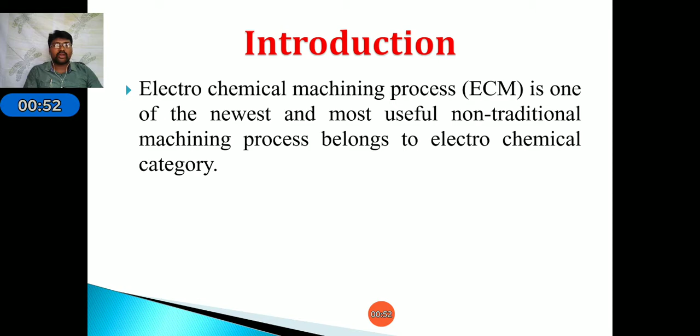The electrochemical machining process is known as ECM, one of the newest and most useful non-traditional machining processes, belonging to the electrochemical category. It is useful to machine metals as well as alloys which are difficult or impossible to machine using conventional machines.

Because if you machine hard materials and alloys, you require special type of machine tools, and the tool must be harder than the given material. By using these conventional machineries, tool wear increases and material removal rate decreases, taking more time. At the time of applying forces, more stresses will be applied on the material. These are the different limitations of the conventional machining process.

In electrochemical machining process, the tool will not touch the workpiece. Based on this, there is no tool wear in this type of machining process.

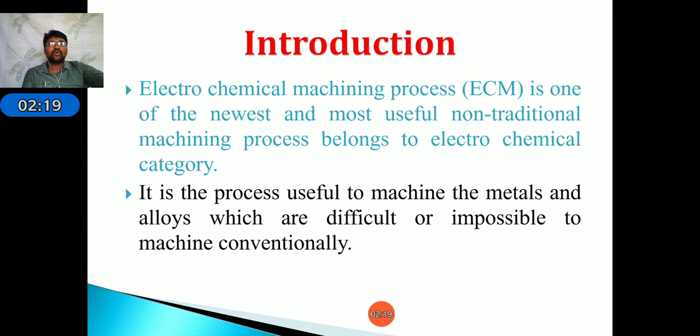Coming to working principle: in ECM, the metal removal takes place by electrochemical dissolution of an anodically polarized workpiece. The metal is removed from the workpiece by passing electricity to it, and the workpiece and tool are immersed in the electrolyte solution, which passes in between the tool and workpiece.

After supplying the electric power source, the negative terminal is given to the tool and the positive terminal is given to the workpiece. In between the tool and workpiece, we maintain some gap, and in that gap we pass the electrolyte solution, which acts as a conducting material. Whenever electricity is passed through the electrolyte, the circuit is closed.

Here, whatever the shape of the tool, the same shape will be machined on the workpiece.

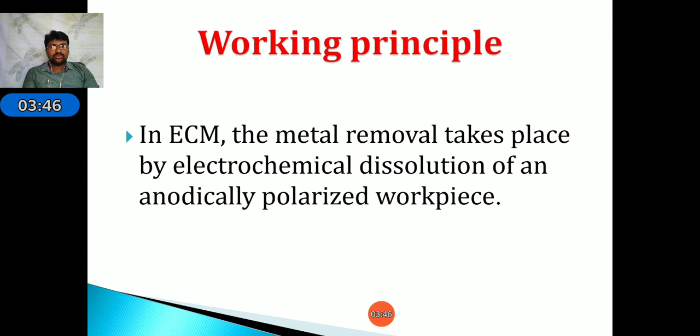We'll go to the working. Here I am showing two diagrams. In the first one, the initial stage of ECM, that is before machining. In the second diagram, the steady state of ECM. The left one indicates the workpiece, and the right is the tool. Both are immersed in the electrolyte solution, and there is a battery.

Whenever we supply the battery, that is supply the power source, the cathode is given to the tool and anode is given to the work. Due to the dissolution, a curve shape is prepared in the tool, and the same shape will form in the workpiece. Whatever the shape of the tool, the same will be mirrored on the workpiece due to the passing of electrolyte solution in between the work and tool.

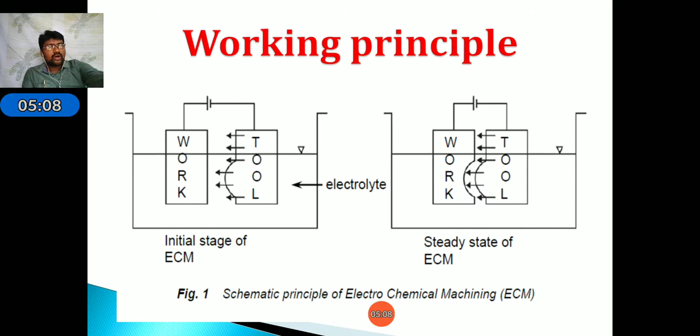In between the tool and workpiece, the electricity will pass due to this dissolution principle. If the material is to be removed, how will it be removed? We'll see in the next diagram.

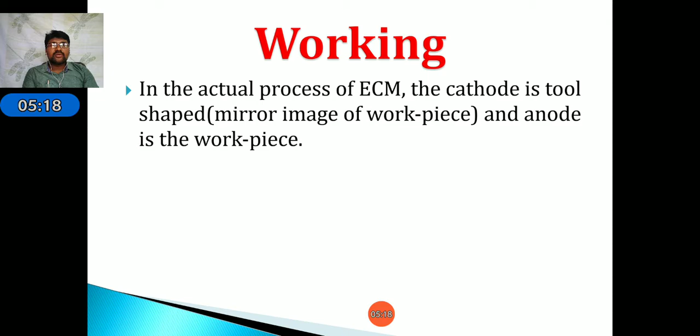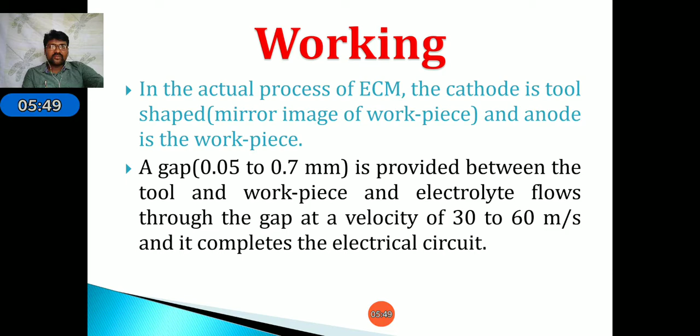In the actual process of ECM, the cathode is tool shaped, that is mirror image of the workpiece, and the anode is the workpiece. The gap between the workpiece and tool is in the range of 0.05 to 0.7 mm based on the type of material, and the electrolyte flows through the gap at a velocity of 30 to 60 meters per second, completing the electrical circuit, so electricity can pass through.

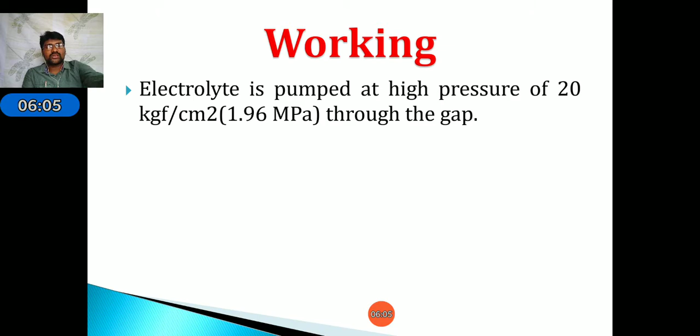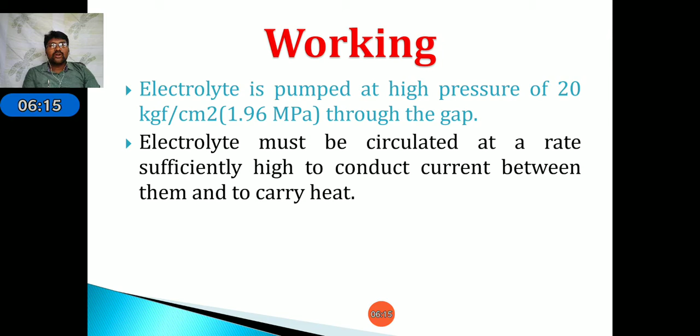The electrolyte is pumped at high pressure of 20 kg per centimeter square, that is 1.96 megapascal, through the gap. The electrolyte must circulate at a rate sufficiently high to conduct current between them and carry heat. The metal is removed from the workpiece by dissolution of material.

Here the Fe, ferrous, and chloride, Fe to Fe++ and Cl- will combine with each other and form FeCl2, that is ferrous chloride. The metal particle from the workpiece will be removed from the workpiece, that is the machining process, and it will react with chloride Cl and form ferrous chloride, and it will form a layer at the bottom of the tank.

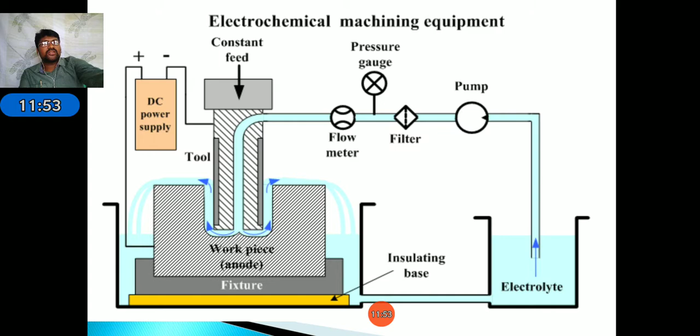Here the power supply's negative terminal is given to the tool, that is the cathode, and the positive terminal is given to the workpiece, that is the anode. Whenever we pass the electricity, the circuit will be closed, and electricity will pass through the tool from the workpiece through the electrolyte solution. When passing the electricity, it reacts with the ferrous material with the electrolyte solution, that is chloride and hydroxide, forming FeCl2 and FeOH2. By that, the material will be removed. Like this the machining process will be completed.

Next, the important elements in ECM are: electrolyte solution, tool, workpiece, and DC power supply.

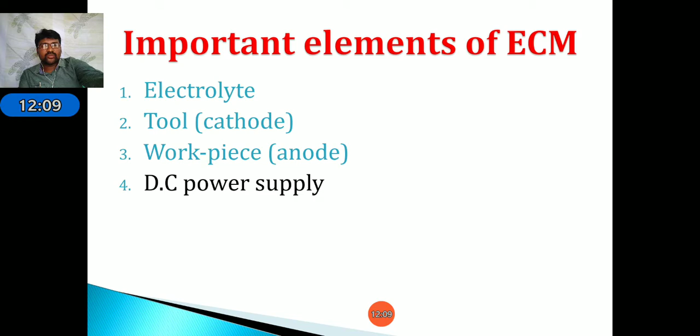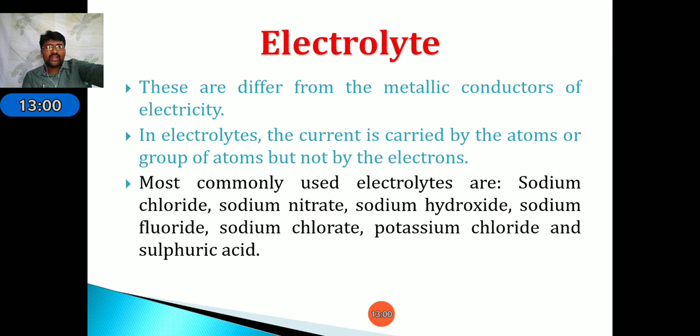Coming to electrolyte, these are different from metallic conductors of electricity. Generally we use copper, steel, and different materials to transfer electricity from one point to another. Here the electrolyte solution acts as a conductor. In electrolytes, the current is carried by atoms or groups of atoms but not by electrons. The most commonly used electrolyte solutions are sodium chloride, sodium nitrate, sodium hydroxide, sodium fluoride, sodium chlorate, potassium chloride, and sulfuric acid. These are the different electrolyte solutions used in the electrochemical machining process.

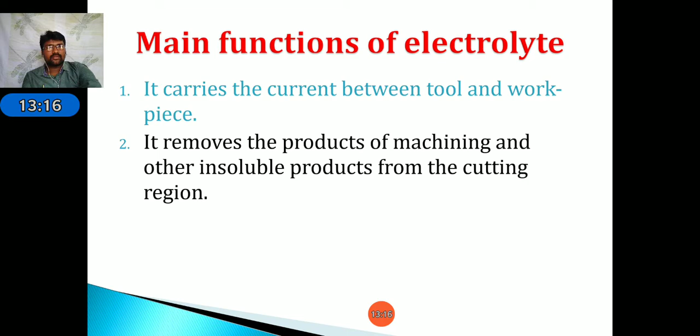The main functions of the electrolyte: it carries the current between the tool and workpiece; it removes the products of machining and other insoluble products from the cutting region. During the metal removal process, the insoluble particles move to the bottom side and are removed from the working area. It also dissipates heat produced in the operation.

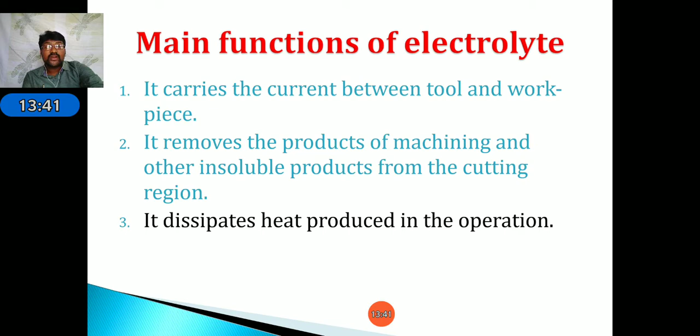The essential characteristics of electrolyte are good electrical conductivity, non-toxicity, chemical stability, non-corrosive property, low viscosity, and high specific heat.

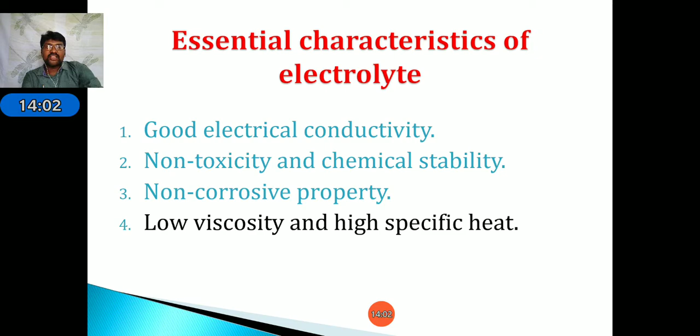Coming to tool material, the most commonly used tool materials are copper, brass, titanium, copper tungsten, and stainless steel. When the electrolyte is made of salts of sodium and potassium, these materials are used as tool material. The other tool materials are aluminum, graphite, bronze, platinum, and tungsten carbide.

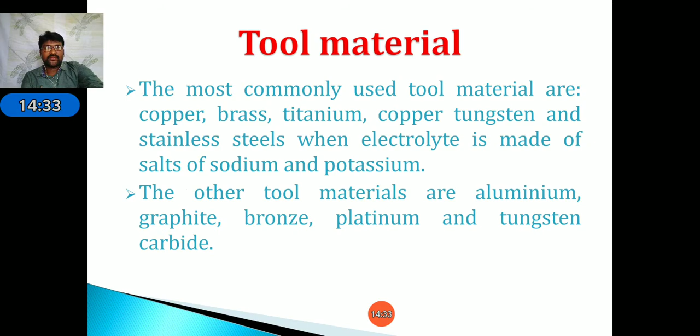Next, coming to metal removal rate. By using Faraday's law of electrolysis, this first law states that the amount of any material deposited or dissolved is proportional to the electricity passed. That is, the material removal rate depends mainly on the electricity passed.

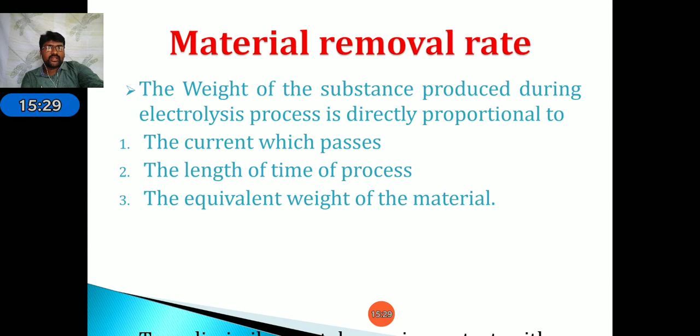From Faraday's second law of electrolysis, the amount of substance produced in the material is proportional to the electrochemical equivalent weight of the material. Based on the weight of the material, it also depends on this. That is, the weight of the substance produced during the electrolysis process is directly proportional to the current which passes, the length of time of the process, and the equivalent weight of the material. Next, two dissimilar metals are in contact with electrolyte, and anode loses metal to cathode. These are the conditions.

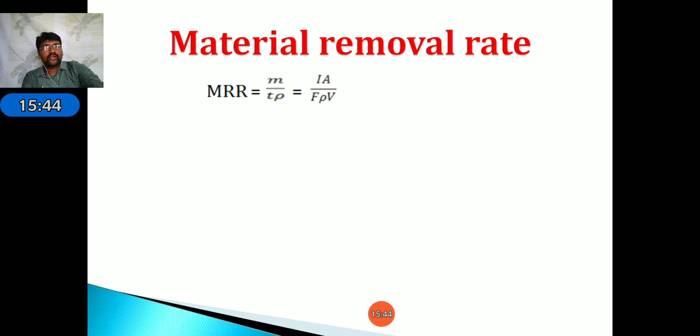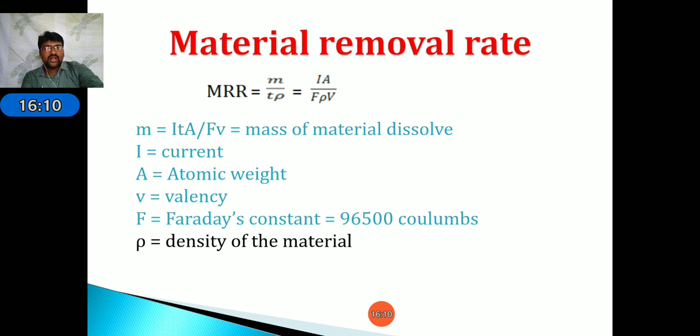Coming to material removal rate, by using mathematical representation: m equals ITA by F V, where m equals mass of material dissolved, I equals current, A equals atomic weight, V equals valency of electrons, F equals Faraday's constant, that is 96500 coulombs, rho equals density of material, and T equals time during which electricity flows into the circuit.

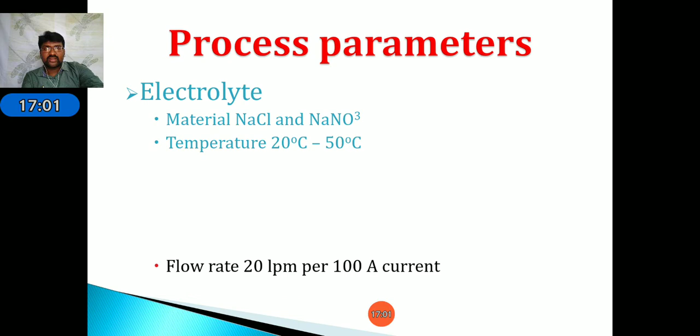Next, coming to electrolyte solution, the material is NaCl, sodium chloride and sodium nitrate. The temperature of the electrolyte should be maintained between 20 to 50 degrees. Flow rate is 20 lpm per 100 ampere current. When we use 100 amperes, the flow rate should be 20 lpm. By increasing the current, the flow rate will also increase. The pressure should be maintained between 0.5 to 20 bar, and dilution is 100 grams per liter to 500 grams per liter.

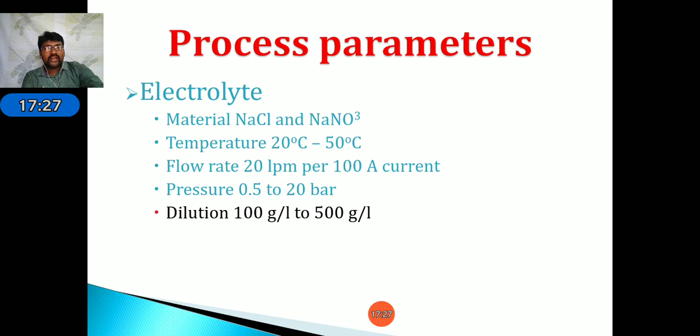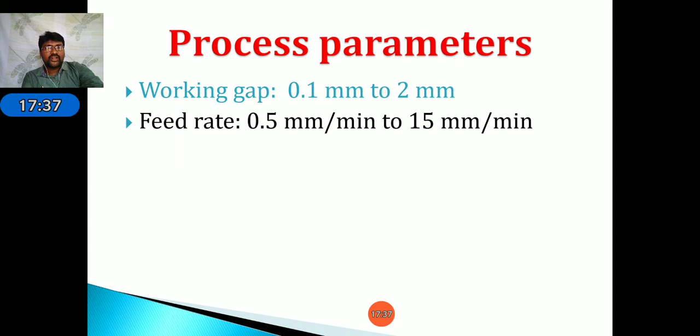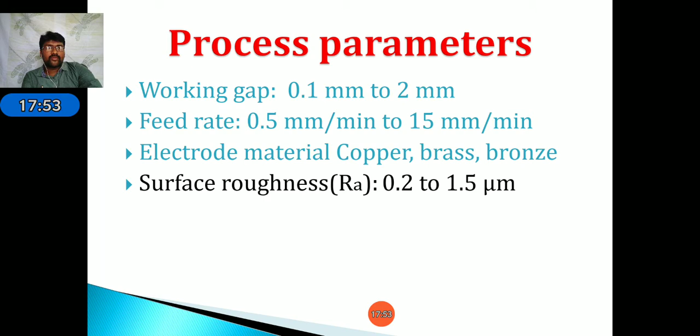Next, working gap, that is 0.1 mm to 2 mm. Feed rate is 0.5 mm per minute to 15 mm per minute. Electrode material, that is copper, brass, bronze. Next, surface roughness, that is 0.2 to 1.5 micrometer. These are the process parameters.

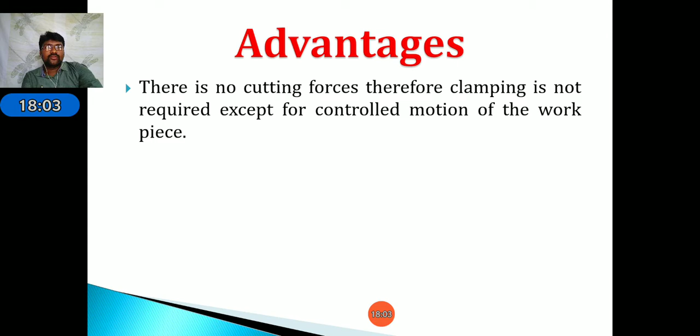Coming to advantages, here there are no cutting forces, therefore clamping is not required except to control motion of the workpiece. As in case of conventional machining process, high amount of forces will be developed during machining, so we have to hold the workpiece. But in case of non-conventional machining process, that is electrochemical machining, we do not require any clamping devices to hold the object.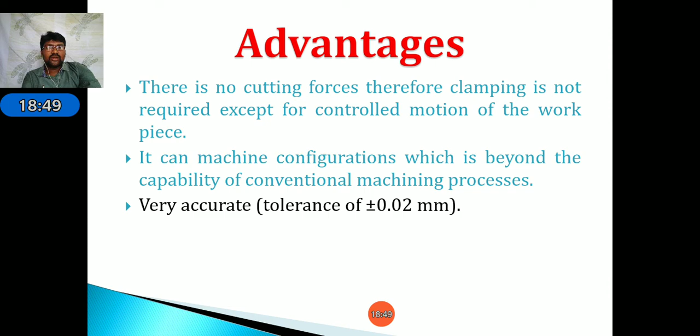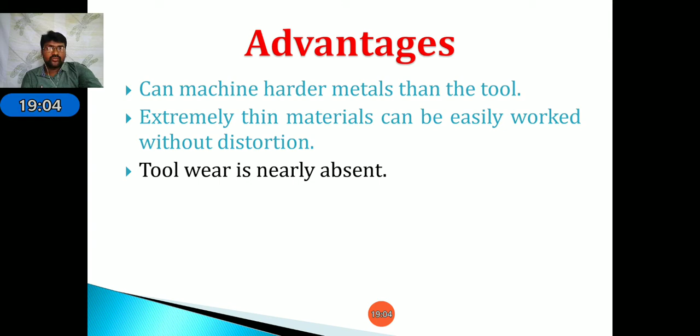It can machine configurations which are beyond the capability of conventional machining process. Next, it is very accurate, with tolerance of plus or minus 0.02 mm - a very accurate process. Next, it is relatively fast. It can machine harder metals than the tool. Extremely thin materials can be easily worked without distortion. Tool wear is nearly absent because the tool will not touch the workpiece. Next, it gives better surface finishing. These are the advantages.

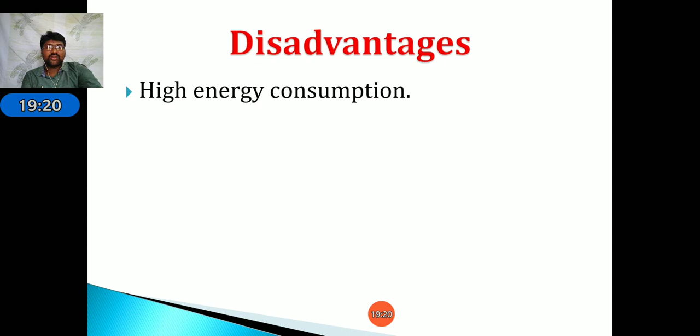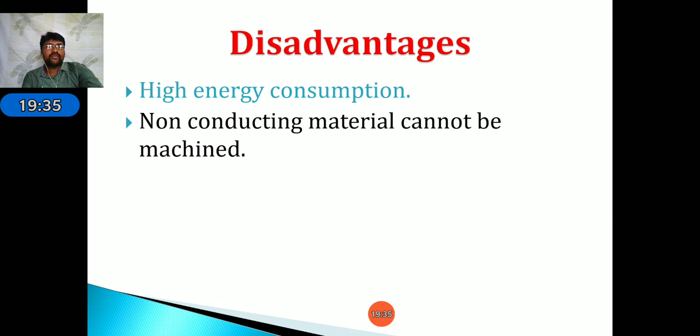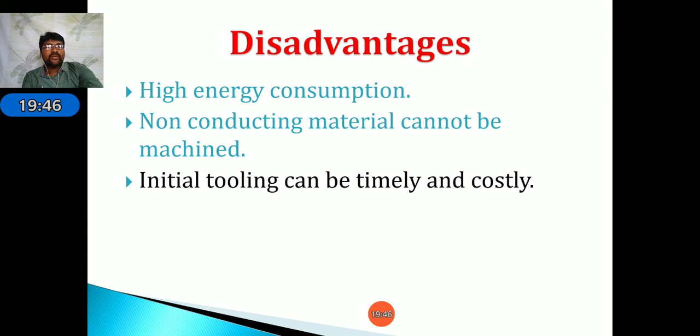Coming to disadvantages: it has high energy consumption because we are using an electrical source. Non-conducting material cannot be machined because electricity will not pass through non-conducting materials. This is one of the disadvantages of electrochemical machining process. Next, initial tooling can be time-consuming and costly. Next, it produces environmentally harmful by-products.

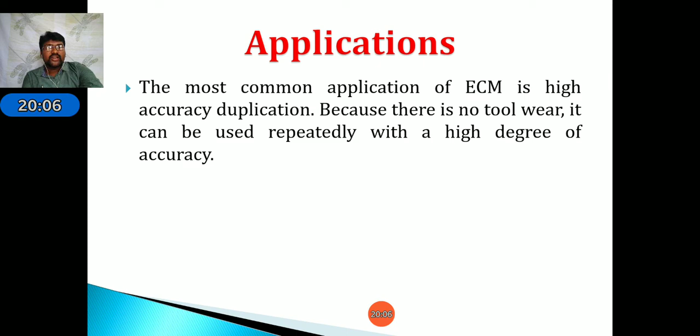Next, coming to applications, the most common applications are: ECM is high accuracy duplication, because there is no tool wear, so it can be used repeatedly with a high degree of accuracy. Next, it is commonly used for thin walled, easily deformable and brittle materials, because they would probably develop cracks with conventional machining process. Next, it is used for machining hard heat resisting alloys.

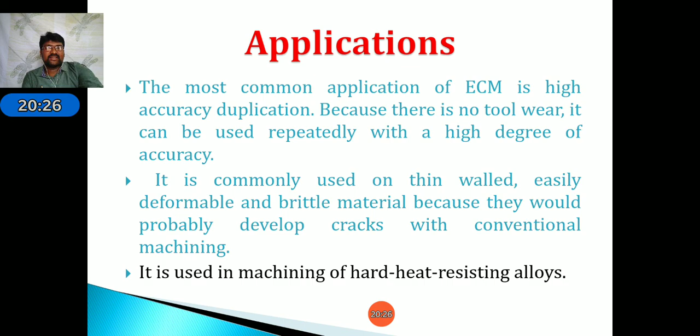Next, it is used in cutting cavities and holes in various products like machining aerospace components, turbine blades, and machining of tungsten carbide and nozzles. These are very hard materials, which are machined by using electrochemical machining process very easily. Next, any conducting material can be machined by this method.

These are the details about electrochemical machining process. Thank you.